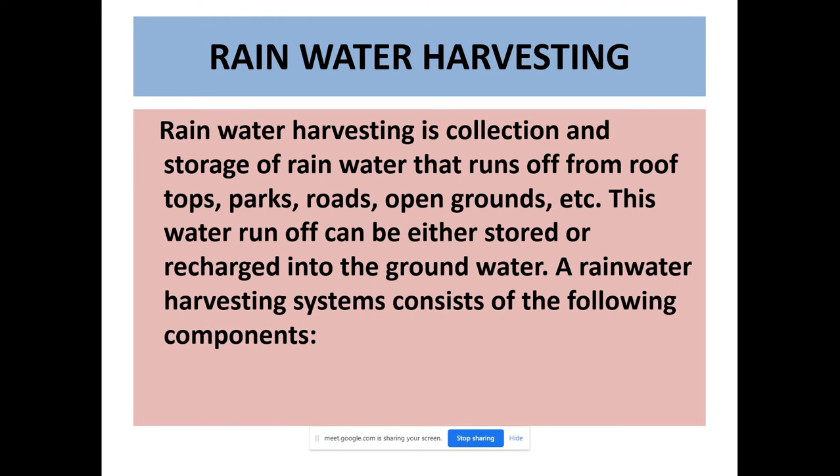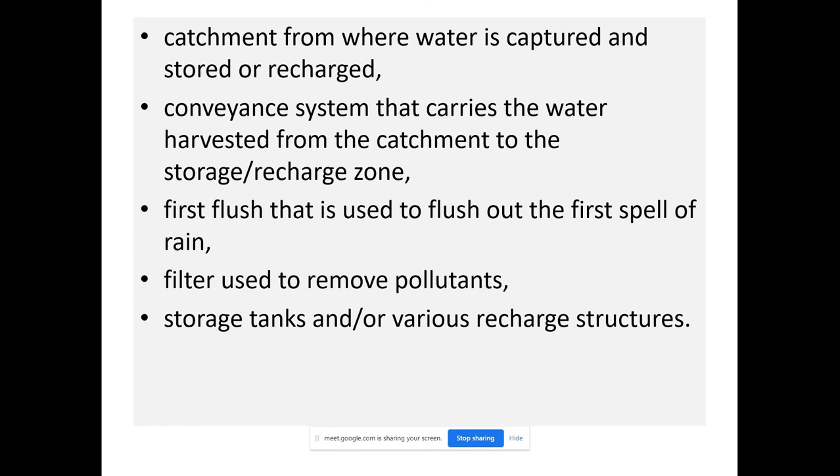A filter to remove the pollutants, and storage tanks. I have also included the diagram of a simple rainwater harvesting system in my PPT, and I request Mamta ma'am to show the next page of my PPT. Yes ma'am, thank you ma'am.

As you can see, this is a simple diagram of a rainwater harvesting system. Rainwater is collected on the roof of your house or building, and the rainwater is stored in the tank, and the tank is connected to the roof with pipes. The pipes will carry the rainwater to the tank.

There are two methods of rainwater harvesting. First is surface runoff harvesting. In this system, the rainwater present on the grounds during the rains will be collected to designated water storage. The flow of small tributaries of rivers or reservoirs is redirected to store the surface runoff. The surface runoff is stored in ponds, tanks, and reservoirs built for this purpose. During the storage of rainwater, efficient and effective water conservation methods are incorporated. Several measures are taken to sustain healthy and hygienic water.

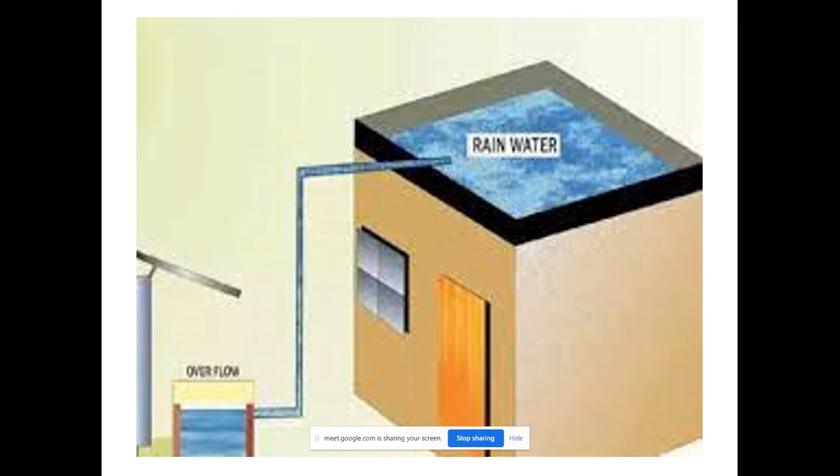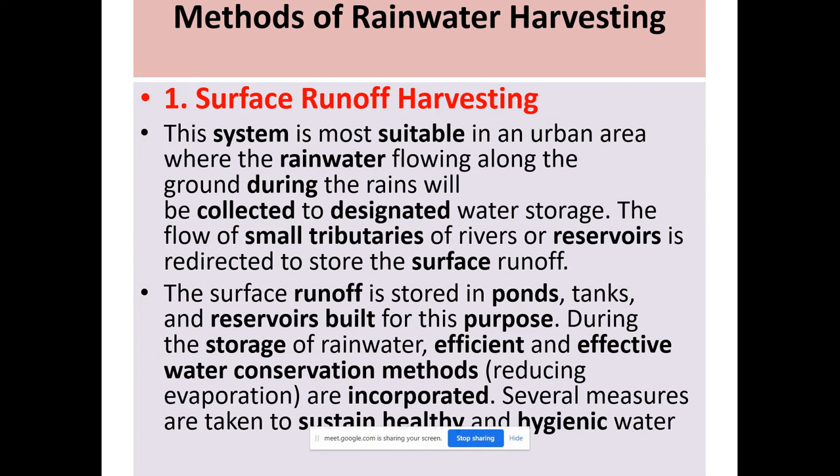And the second method of rainwater harvesting is rooftop rainwater harvesting. Ma'am, I request you to please show the next slide, yes. This is the slide of surface runoff rainwater harvesting system, and this is the diagram. In this system, the rainwater is collected on the grounds, and it is stored in tanks.

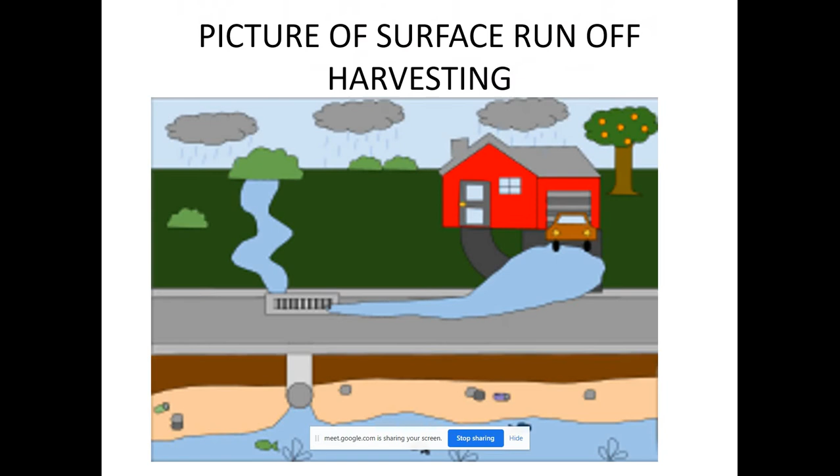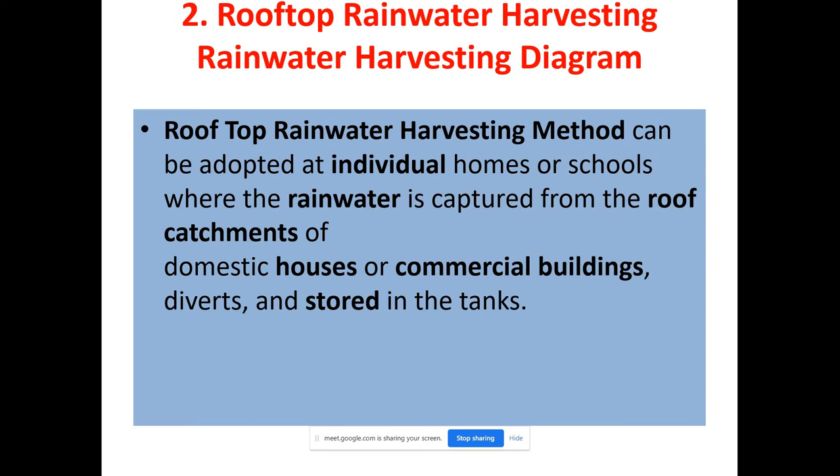Second method is rooftop rainwater harvesting system. This method can be adopted in individual homes or schools where the rainwater is captured from the roof catchment of domestic houses or commercial buildings, diverted and stored in tanks. Harvested rainwater can either be stored in a tank or diverted to an artificial recharge system to meet daily needs such as flushing toilets, washing machines, vehicles, gardens, showers, sinks and baths.

This is installed in the following places. You can install it in your home, school, college, apartment, flats, story buildings, industries, factories, mills. This water can also be used in swimming pools where we need a large amount of water, and it can also be installed in stadiums.

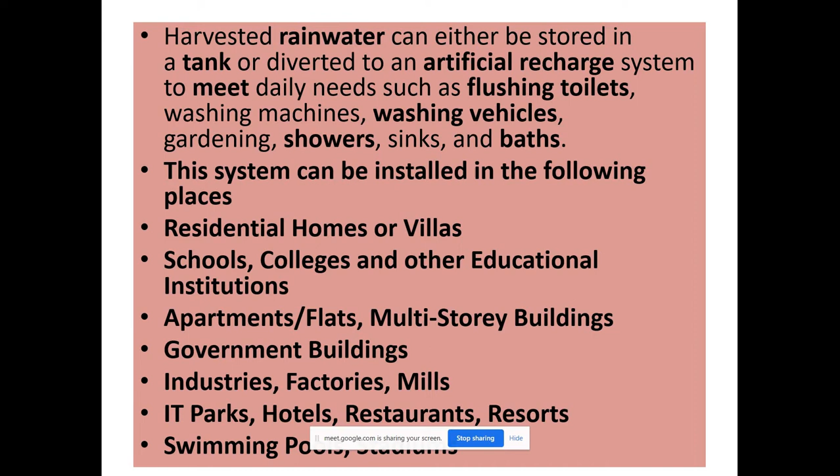Now I am going to tell you about the components of the rooftop rainwater harvesting system. First is catchment. The catchment of the rainwater harvesting system is the surface area that receives the direct rainfall and contributes rainwater to the harvesting system. It can be a terrace, the roof, flat roof, stone roof or sloping roof, courtyard or paved or unpaved open ground.

The second component is transportation. Transportation of rainwater from the rooftop is carried to the harvesting system through water pipes or drains. The mouth of each drain should be surmounted by wire mesh to restrict floating material, and water pipes must be UV resistant to the desired capacity.

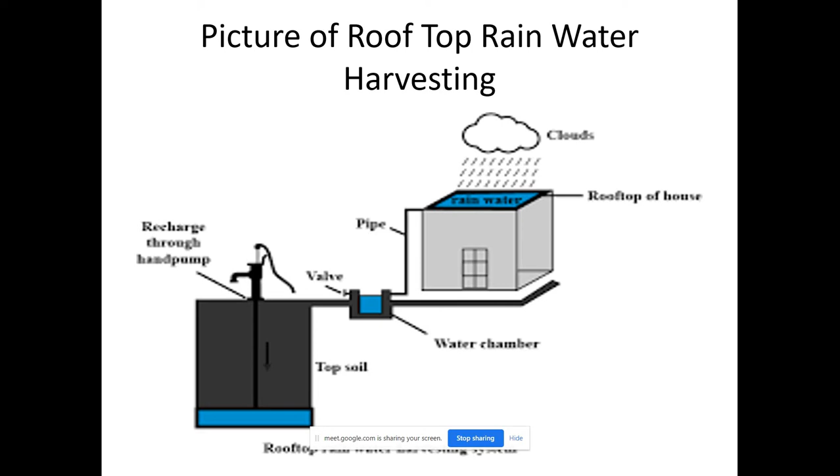The third is filter. The filter is used to filter the rainwater because rainwater contains many pollutants. To filter the pollutants, we use filters, such as filter papers installed in the pipes. Filters are used for removing turbidity, color and microorganisms from water. Gravel, sand and mesh filters are designed to place on top of the storage tank, and their function is to remove silt, dust, leaves and other organic matter from entering the storage tank.

In this way, you can install the rainwater harvesting system in your homes, houses and educational institutions and save water to meet the water demands. That's all, ma'am. Thank you.

Okay, why are filters used? This is used to check the contamination of sewer water, ma'am. Because I think rainwater is also pure water that can be used to drink, or for other purposes. First of all, ma'am, maybe rainwater is pure, but our roof may contain pollutants, like dust, or some other type of thing that may contaminate the water and pollute it.

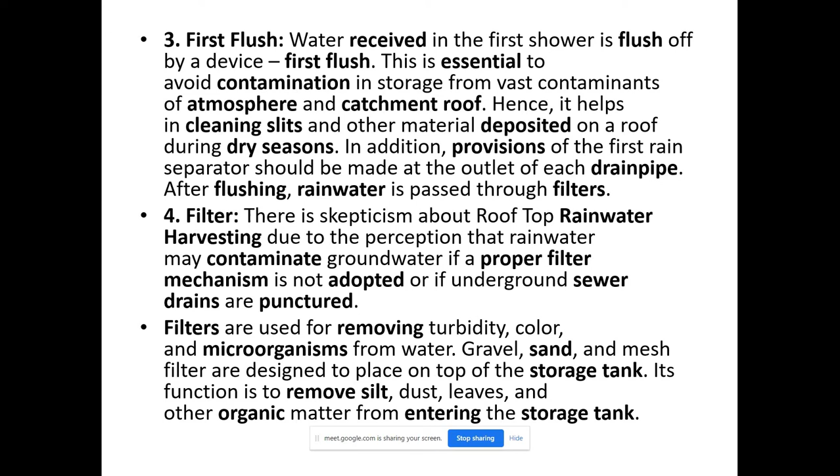Yes, we also need to say what is the source of where we are saving this water, rainwater. Like on the ground, if we are saving on the ground, it should not be mixed with other things. In our home, we can build underground tanks where we need the filter to save rainwater. I also want to add that at present, in my own home, I have a rainwater harvesting system. We have built an underground tank to save rainwater. So I think for underground water, filters are necessary so that it cannot be mixed with sewer water or other types of water. Yes, filter is important.

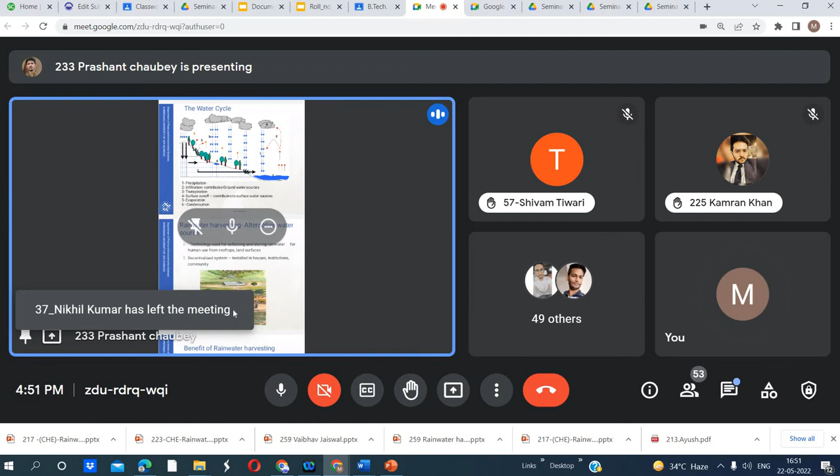Whereas other world forums, like the United Nations Environmental Program, take regular decisions on rainwater harvesting.

This is a very simple method. Generally, the roof of the house acts as a water collector. Then through pipes, water is stored in a tank or a container, and this can be used for our daily uses.

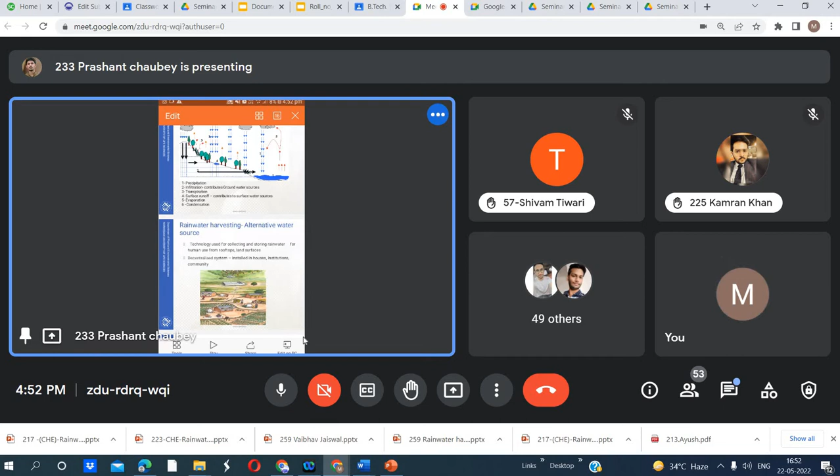It can be used for drinking too when we filter it in a proper manner, and it can be used for toilets and other places.

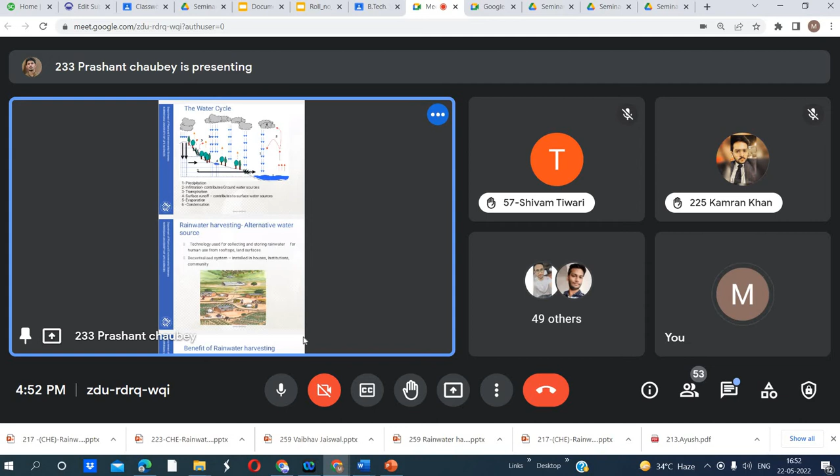The most important thing about installing a rainwater harvesting system is to know about the rainfall of that area. Rainfall is the most important factor to decide the efficiency and use of a water harvesting plant. Thank you.

Ma'am, is the screen visible to you? Okay, just increase your size. Just zoom it.

Use of harvested rainwater for non-potable purposes is mainly in urban areas, for gardening, flushing, and washing clothes. Potable water use, ensuring quality, is mainly in rural and peri-urban areas. This is a small-scale rainwater harvesting system and its uses.

So, rainwater harvesting system is basically a technique to store rainwater for use of different kinds. It is very economical, and since we are lacking water in this contemporary time, rainwater harvesting is a very good alternative for managing water as a resource in deserts and water-scarce areas. This is all my presentation. Thank you, ma'am.

Okay, please open my PPT 225. Would you like to ask any question? This is not the way, na? You should learn some manners, because it was my turn, I have given it to Punit to attend. He has to catch a train. That's why I am providing you a good platform, but you should follow manners. Okay, I think I'm taking it. Now, who wants to present?

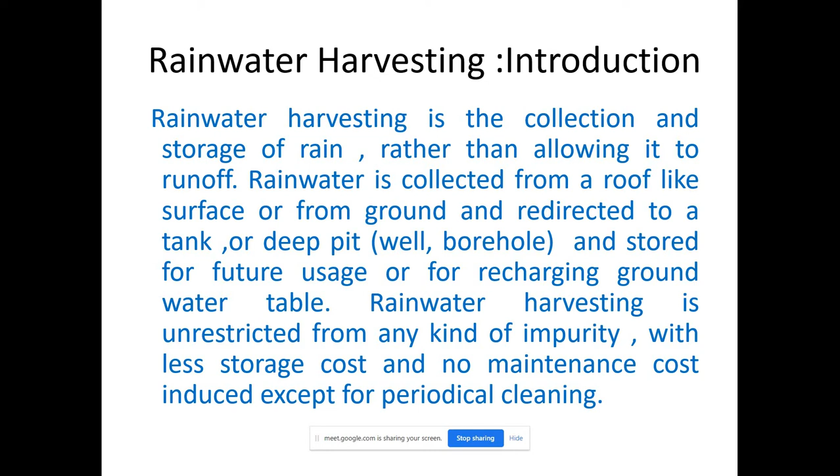To meet the increasing demand of water, as the population increases, the demand of water is also increased. That's why we have need of water harvesting. It can be harvested by reducing runoff, reducing soil erosion, improving groundwater, and increasing agriculture production.

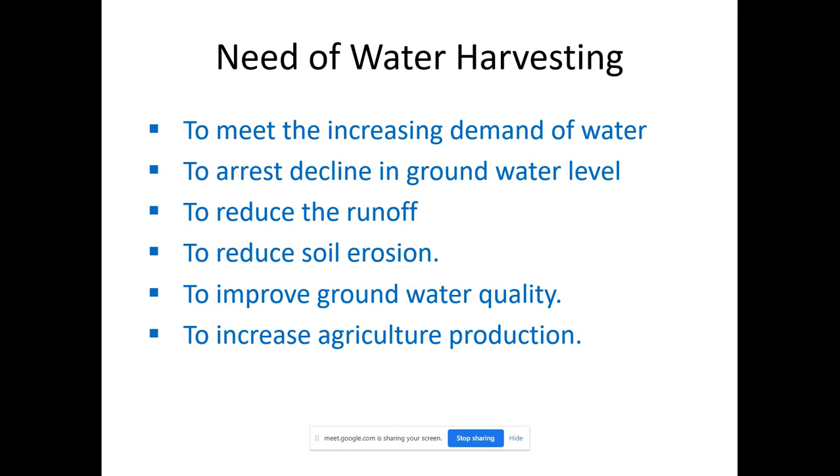We have two methods of water harvesting: surface runoff and roof water harvesting. Surface runoff is a method of collecting rainwater flowing along the ground during rains. It is collected in a tank below the surface of the ground for irrigation and other purposes. In urban areas, this method is followed very well because water is collected on roads and roofs.

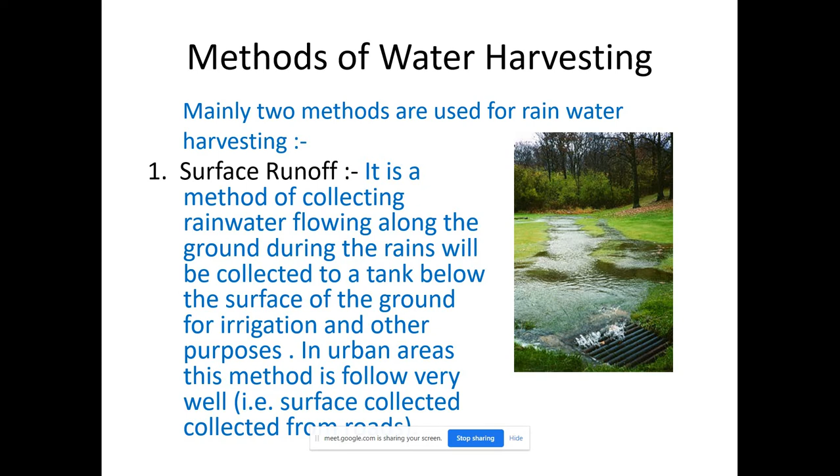This is completed. Rooftop rainwater harvesting: in rooftop rainwater harvesting, the roof becomes the catchment and rainwater is collected from the roof of the house or building. It can either be stored in a tank or directed to an artificial recharge system. This method is less expensive and very useful, and if implemented correctly, helps in augmenting the groundwater level of the area.

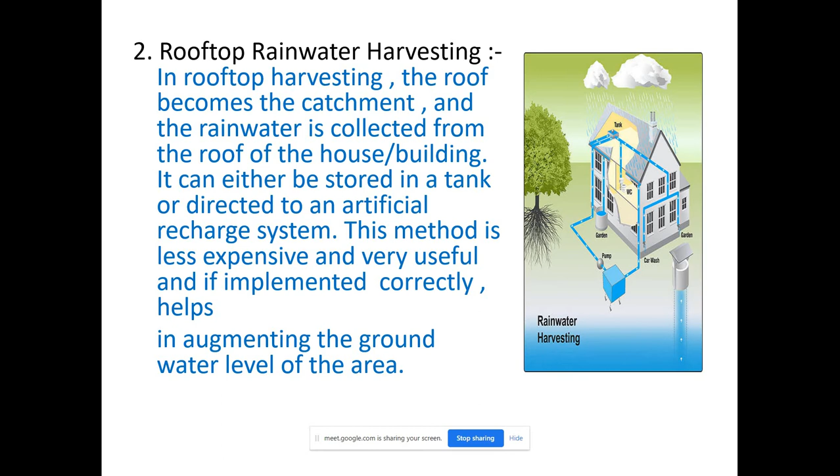Now, advantages and disadvantages of water harvesting. Advantages of water harvesting: reduce water shortage, prevent flooding, reduce soil erosion, improve quality of water, increase the groundwater table and quality, help in reducing water and electricity bills, low maintenance cost and easy to maintain.

Disadvantages of water harvesting: initial high cost, because we buy pipes and labor, so the initial cost is high for water harvesting. Regular maintenance is required to prevent impurities that come from the top and from roads. Storage limit, unpredictable rainfall. If not installed correctly, it may cause waterborne diseases like malaria, typhoid, etc.

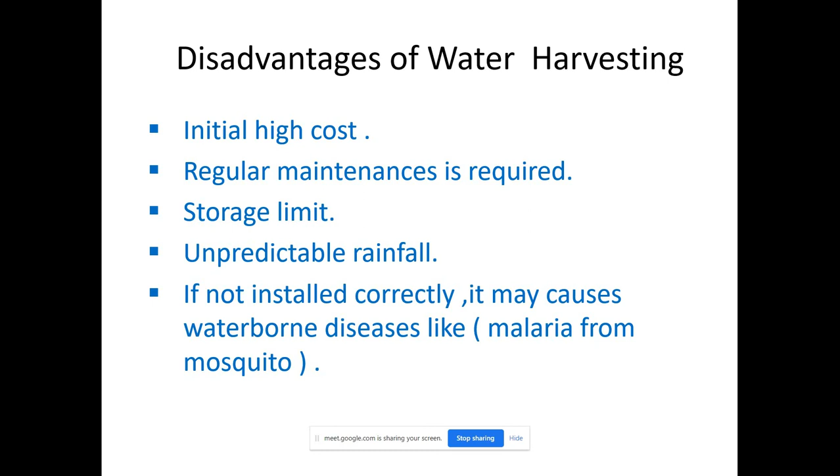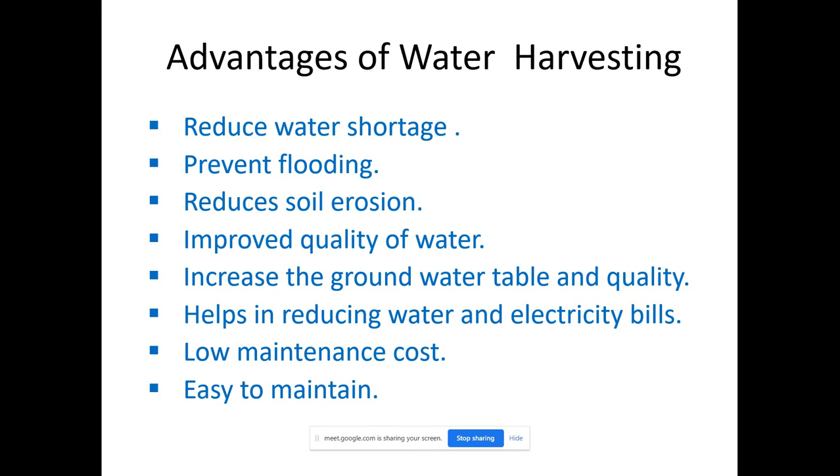Okay, what you can do, Garima, in the future for the development of water resources, the method of water resource management, because rainwater harvesting system is one of the water resource management systems. Is there any other method?

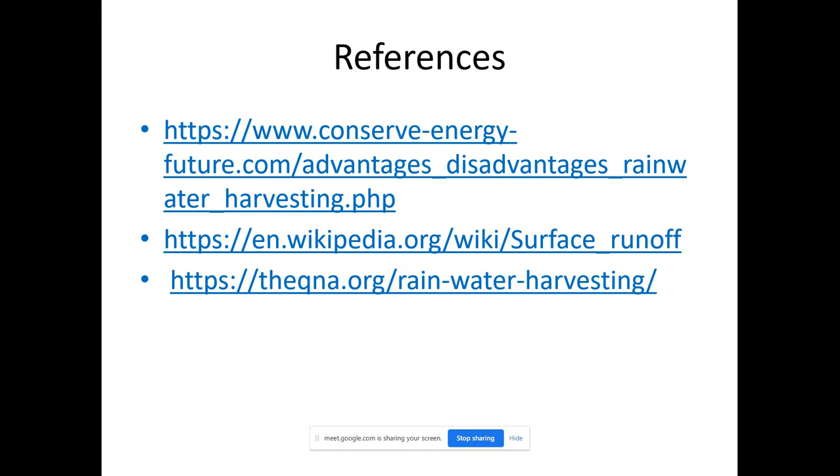Can you suggest? Yes, ma'am. In villages, we dig a pit in which we store our water for agriculture and irrigation. This was very helpful for the future, because in rural areas the water is very insufficient for agriculture.

In urban areas, the water is easy to use, and we use motors, so water is very wasted in urban areas. But in rural areas, we draw the water through hand pumps and from wells.

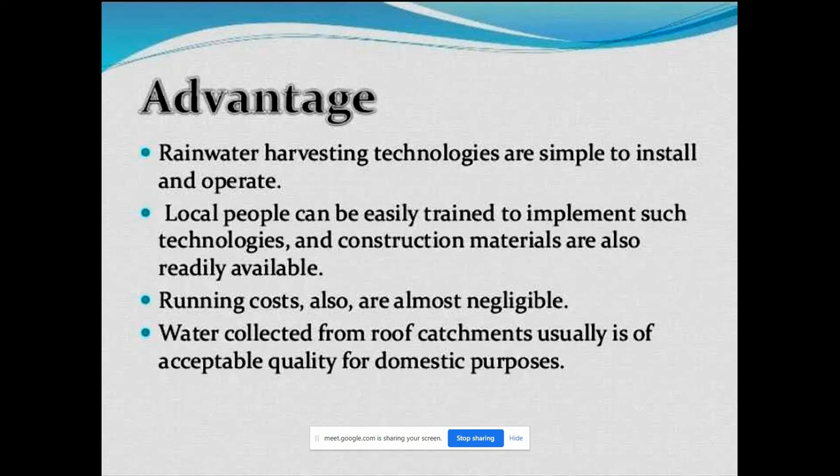Then, what is the advantage of rainwater harvesting? Advantages of rainwater harvesting: reduce water storage needs, prevent flooding, reduce soil erosion, improve the quality of water, increase groundwater table and quality, help reduce water and electricity bills, mitigate the effects of drought, low maintenance cost, environmentally eco-friendly, and easy to maintain.

Then we will know about the disadvantages of rainwater harvesting.

Disadvantages include unpredictable rainfall, initially high cost, regular maintenance, storage limits if not installed correctly, and the risk of attracting mosquitoes and other pests. There are different methods to collect rainwater harvesting.

I am discussing only two methods. The first is surface runoff, and the second is roof rainwater harvesting. In surface rainwater harvesting, in urban areas rainwater flows as surface runoff, which can be captured and used to recharge aquifers by adopting the appropriate method.

The second method is roof rainwater harvesting. It is a system for catching rainwater where it falls on the rooftop. The roof becomes the catchment, and rainwater is collected from the roof of the house or building. This method is less expensive and very effective.

Now we will learn about the components used in rainwater harvesting. First is the catchment area, then transportation, first flush, storage system, delivery system, and filter system. The catchment area is the surface that receives the rainfall directly in a rainwater harvesting system. It may be a terrace, courtyard, etc.

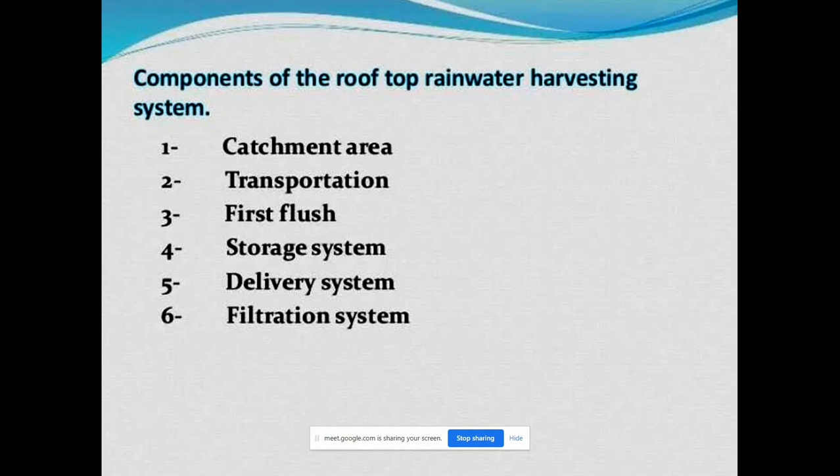Next is transportation. Rainwater from rooftops should be carried through down-take water pipes and drains to the storage harvesting system. The water pipes should be UV resistant and sized for the required capacity.

Next is first flush. What is it? First flush is a device used to flush off the water received in the first shower of rain. This is needed to avoid contaminants from the atmosphere and the rooftop catchment entering the rechargeable water.

Next is the storage system. All collected rainwater is stored in a tank or barrel. Next is the delivery system, which delivers water for usage. Pumps are used to take out water from the tanks and deliver it for many purposes. There are many methods of water delivery.

Next is the filtration system. Filters are used to treat water, effectively removing turbidity, color, and microorganisms. After the first flush, the rainwater should pass through the filter. There are different types of filters in practice, but their basic function is to purify water.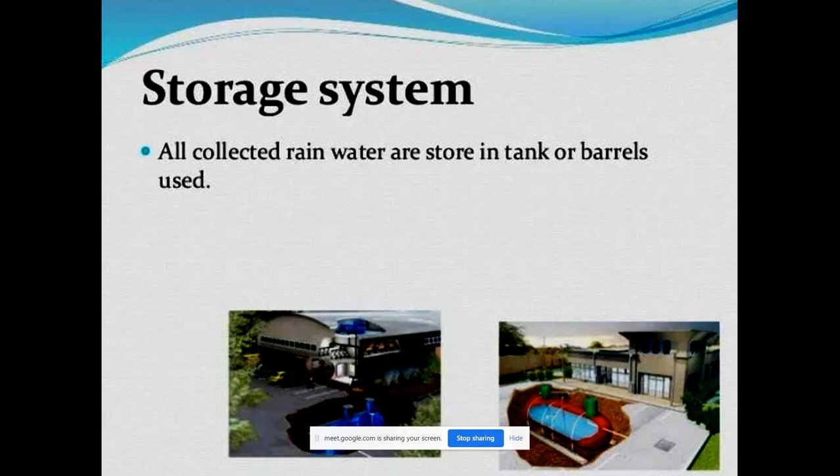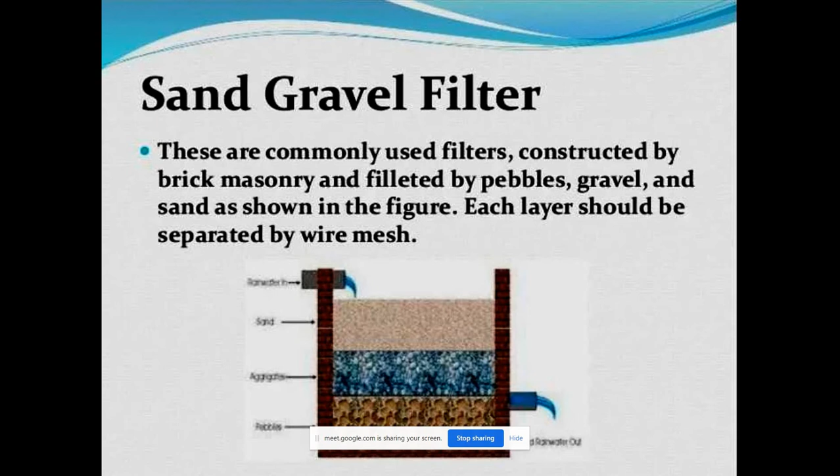Sand and gravel filters are commonly used, constructed with bricks and masonry, filled with pebbles, gravel, and sand as shown in the figure. Each layer should be separated by wire mesh. Another type is the charcoal filter, which can be made in-situ or in a drum. Pebbles, gravel, sand, and charcoal are layered in the drum or chamber, each layer separated by wire mesh, with a thin layer of charcoal used for absorption.

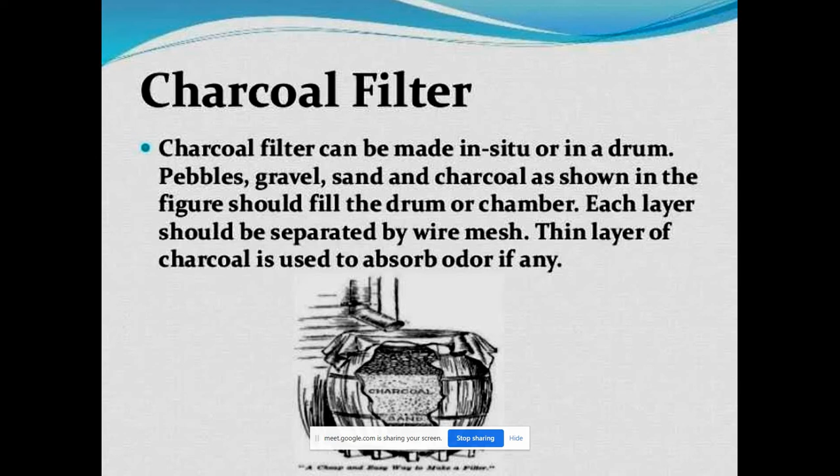For example, in Tamil Nadu, rainwater harvesting was made compulsory in every building to avoid groundwater depletion. In Rajasthan, rainwater harvesting has traditionally been practiced by the people of the Thar desert. At present, in Pune, Maharashtra, rainwater harvesting is compulsory for new societies.

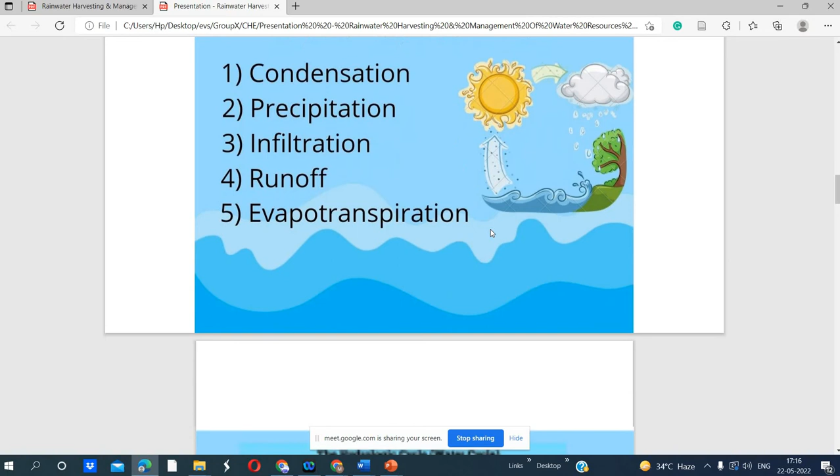Evapotranspiration. The hydrological cycle, water cycle is... ma'am, please change the slide. Precipitation is a product of condensation of atmospheric water vapor, falling under gravity to the land surface as rain. It infiltrates the soil or flows to the ocean as runoff or surface water, evaporates returning moisture to the atmosphere, while vegetation returns water to the atmosphere by transpiration.

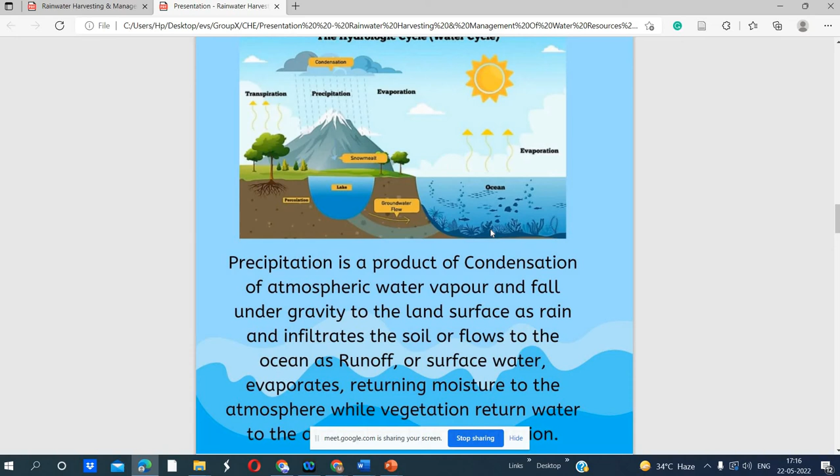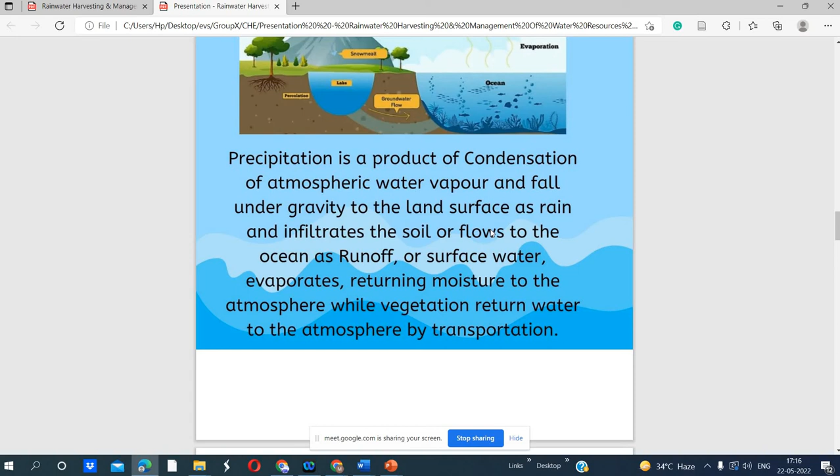Rainwater harvesting is a promising alternative infrastructure amid increasing water scarcity and escalating demand for water supply. It maximizes water efficiency by capturing it and minimizes environmental impact for large projects where pressure on water supply occurs.

The term rainwater harvesting system refers to a technology used to collect and convey rain for future use from relatively clean surfaces such as roof, land surface, or rock catchment, and store it.

Management of water resources: we are using different types of technology to store the water. There are several rainwater harvesting technologies to store the water. Huh? What are you telling? You're just reading the slide, but read it properly. Store the water, okay yes, carry on, store the water.

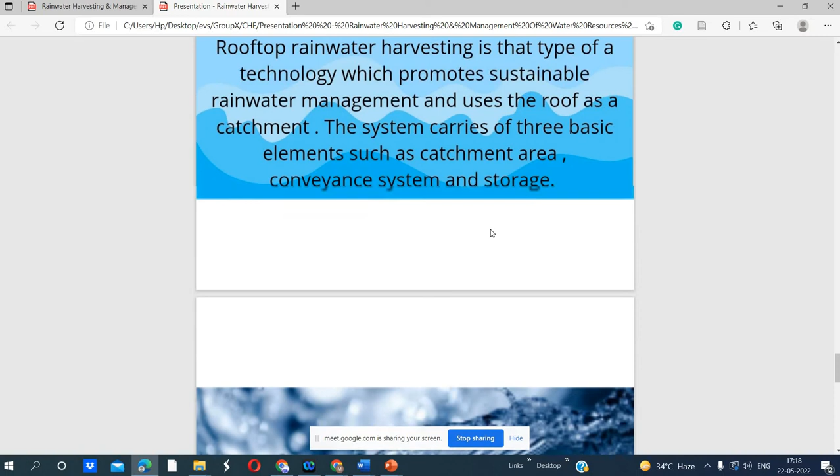There are several rainwater harvesting technologies such as rooftop, surface water, and groundwater recharge. Rooftop rainwater harvesting is a type of technology which promotes sustainable rainwater management and uses the roof as a catchment. The system comprises 3 basic elements: catchment area, conveyance system, and storage.

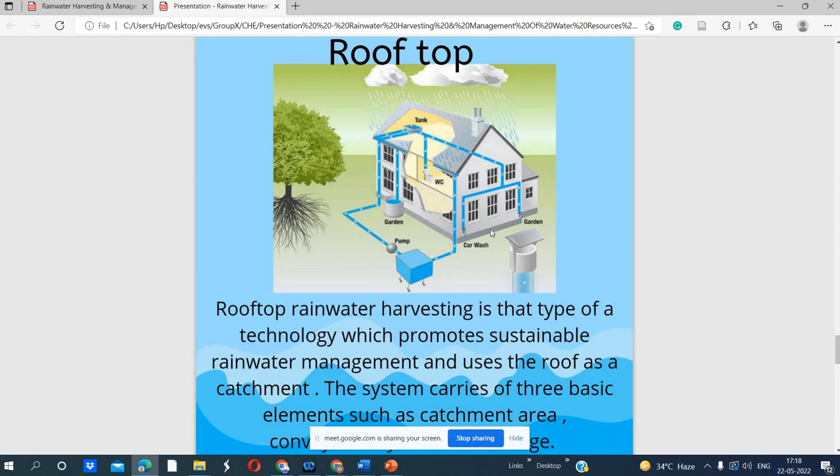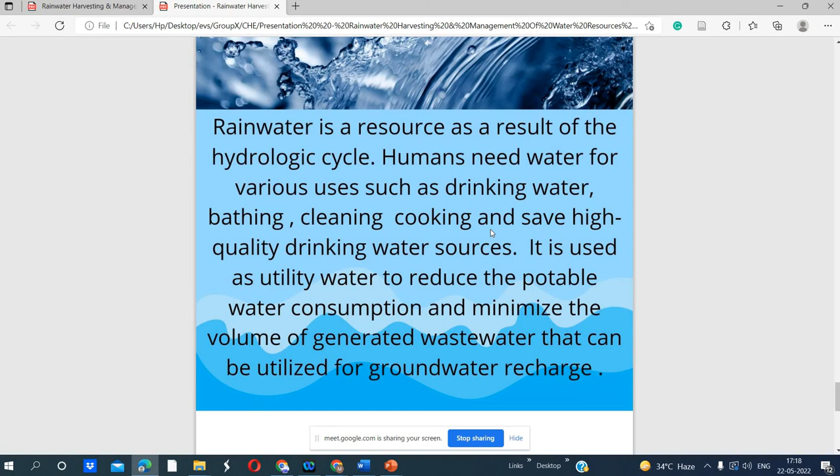Rainwater is a resource resulting from the hydrologic cycle. Humans need water for various uses such as drinking, bathing, cleaning, cooking, and save high quality drinking water sources. It is used as utility water to reduce potable water consumption and minimize the volume of generated wastewater that can be utilized for groundwater recharge. Thank you.

Okay, can you suggest any development to this method? What do you think? How can you use your present education for the development of this method?

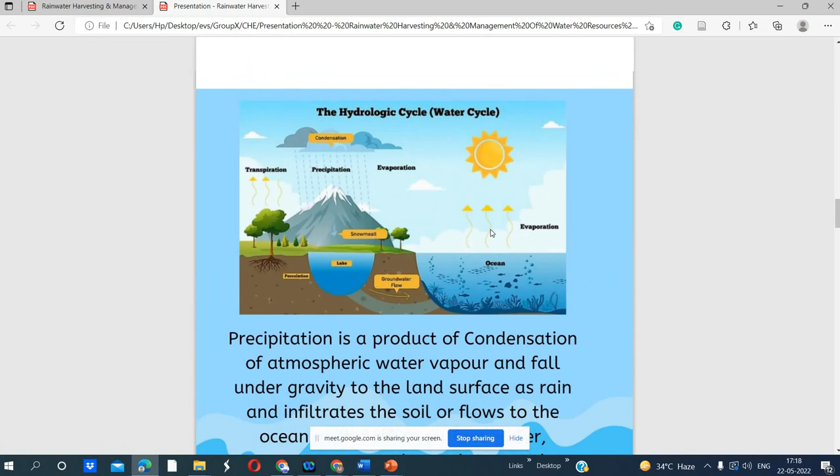Rainwater harvesting is a method to store water for a long period of time, and it is easily usable and sustainable to develop different types of tanks to store water for several works.

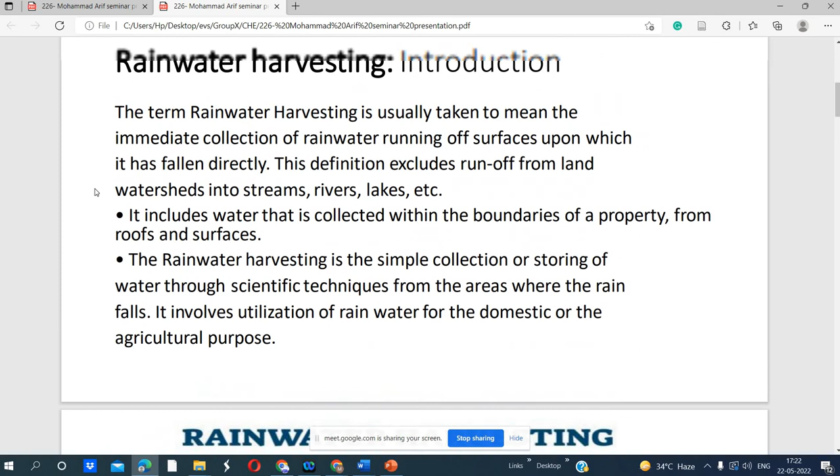Methods of rainwater harvesting: Surface runoff harvesting is a method in which rainwater flowing as surface runoff is caught and used for recharging aquifers by adopting appropriate methods. Rooftop rainwater harvesting: in rooftop harvesting, the roof becomes the catchment and the rainwater is collected from the roof of the house or building. It can either be stored in a tank or diverted to an artificial recharge system.

Technique: storage of rainwater on surface for future use. The storage of rainwater on surface is a traditional technique using structures such as underground tanks, ponds, check dams, weirs, etc. Advantage of rainwater harvesting: it reduces runoff which chokes drains and avoids flooding of roads, provides self-sufficiency to water supply, and supplements domestic water requirements during summer and drought conditions.

Disadvantage of rainwater harvesting: catchment surfaces and guttering structures must be cleaned and flushed before use. Poorly constructed water jars and containers can suffer from algal growth and invasion by insects, lizards, and rodents. They can act as a breeding ground for disease vectors if not properly maintained.

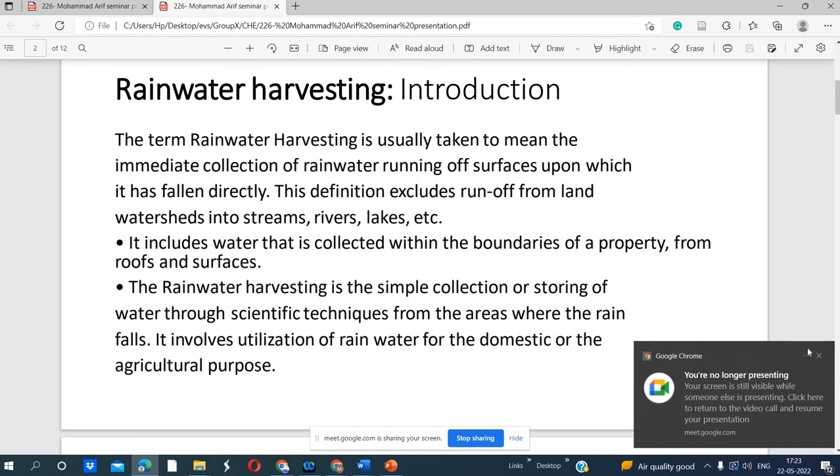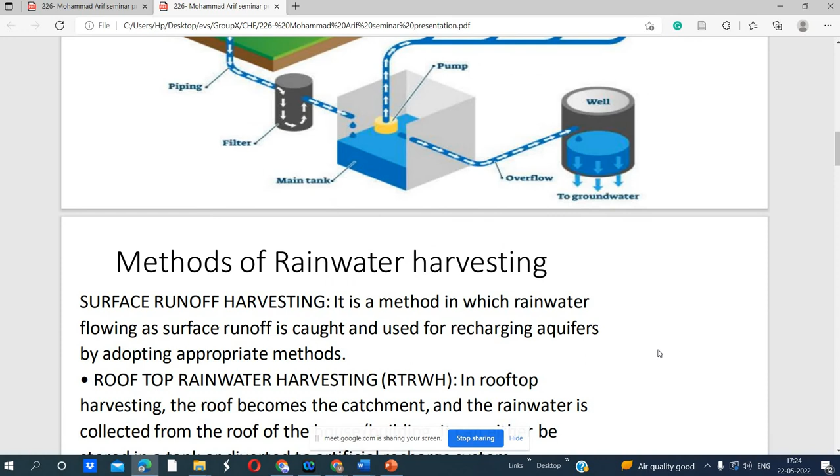Management of water resources: water resources management is the activity of planning, developing, distributing, and managing the optimum use of water resources. It is an aspect of water cycle management. Desiltation: channels, canals, tanks, and yeris must be desilted regularly during the summer months. People should be encouraged to revive the ancient practice of protecting trees around tanks. Major rivers were sanctified and groves were established around villages and on river banks.

Afforestation of barren hilly slopes on a war footing should be carried out. Trees withstand drought better than crops. They check dust, replenish streams, provide shade to cattle and men, and give fodder for cattle. Ponds and tanks: creation of small reservoirs and percolation tanks to hold runoff water must be implemented and maintained well.

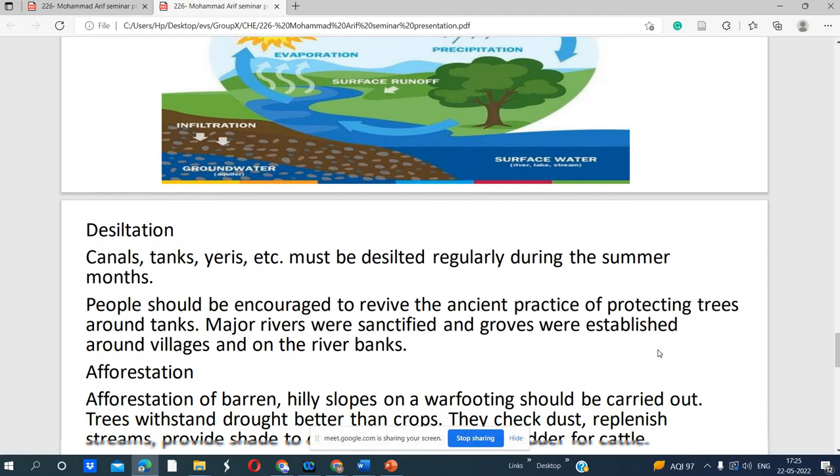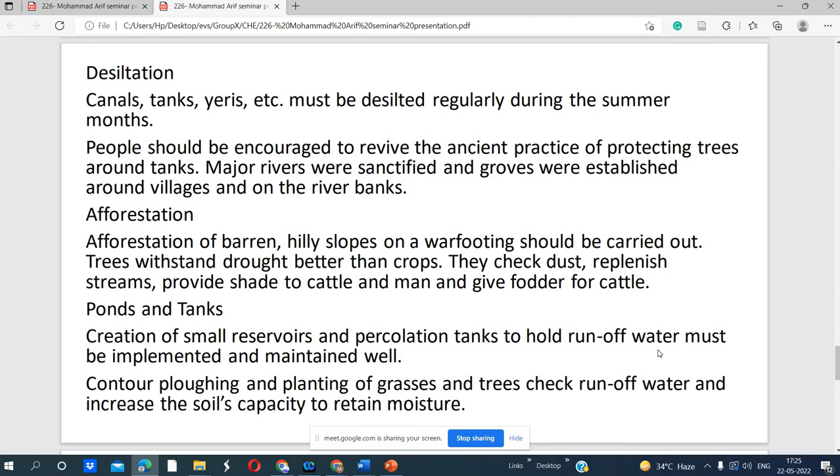Contour plowing and planting of grasses and trees helps retain runoff water and increases the soil's capacity to retain moisture. Green manuring and mulching the soil, along with drip irrigation, is most suited for widely spaced row crops like vegetables, cotton, and sugarcane for harvesting rainwater. Thank you, ma'am.

Okay, what do you suggest for the development of more water resource management methods? Ponds and tanks are most valuable. Creation of small reservoirs and percolation tanks to hold runoff water must be implemented and maintained well.

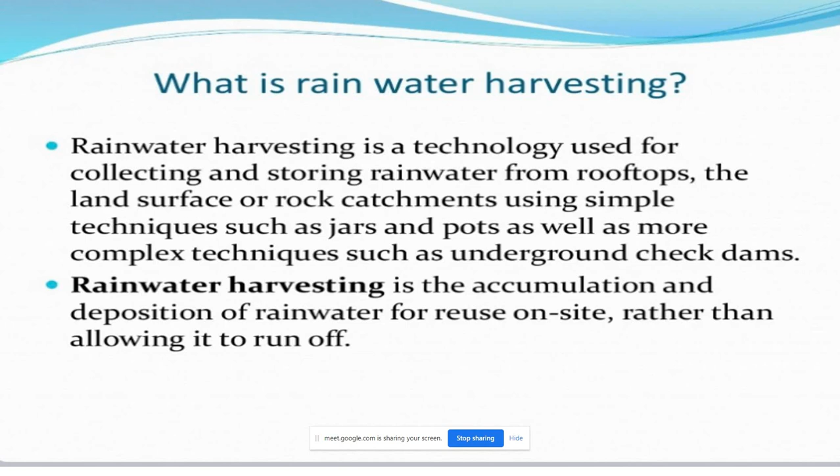The combination of urban green rooftops with rainwater catchments have been found to reduce building temperature by more than 1.3 degrees Celsius. Rainwater harvesting in conjunction with urban agriculture would be a viable way to help meet the United Nations Sustainable Development Goals. Uses of rainwater include recharging underground water, gardening, livestock, drinking purposes, and irrigation purposes.

Advantages of rainwater harvesting technologies: simple to install and operate, local people can be easily trained to implement such technologies, and construction materials are also readily available.

How can we harvest rainwater? Broadly, there are two ways of harvesting rainwater: surface runoff harvesting and rooftop rainwater harvesting. Rooftop rainwater harvesting is a system of catching rainwater where it falls. In rooftop harvesting, the roof becomes the catchment and the rainwater is collected from the roof of the house or building. This method is less expensive and very effective.

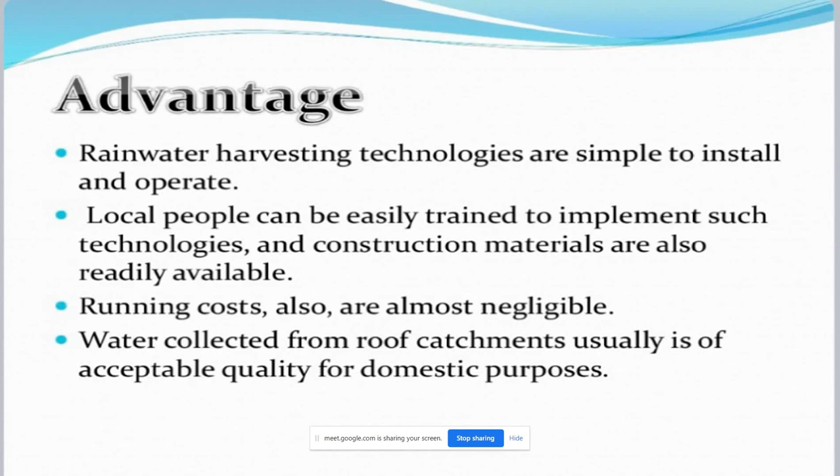The transportation of rainwater from a rooftop should be carried through downtake water pipes or drains to the storage or harvesting system. The water pipe should be UV resistant and of required capacity.

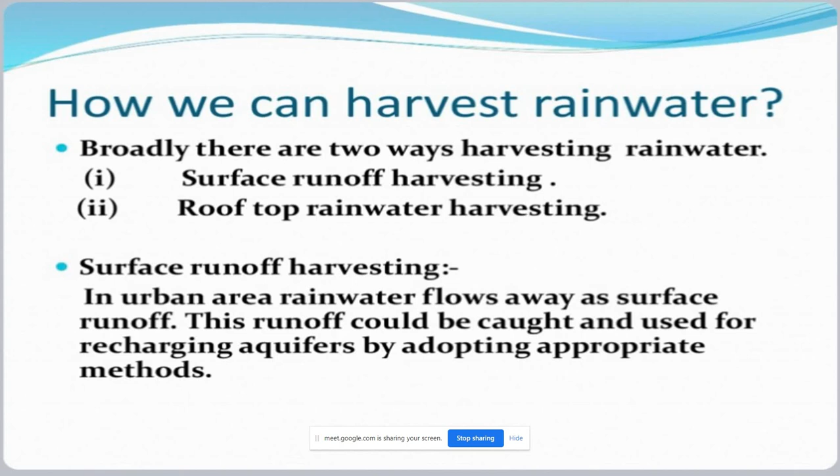Management of water resources provides an independent water supply during regional water restrictions, and in developed countries it is often used to supplement the main supply. It provides water when a drought occurs, can help mitigate flooding of low-lying areas, and reduces demands on wells, which may enable groundwater levels to be sustained. Rainwater harvesting increases the availability of water during the dry season.

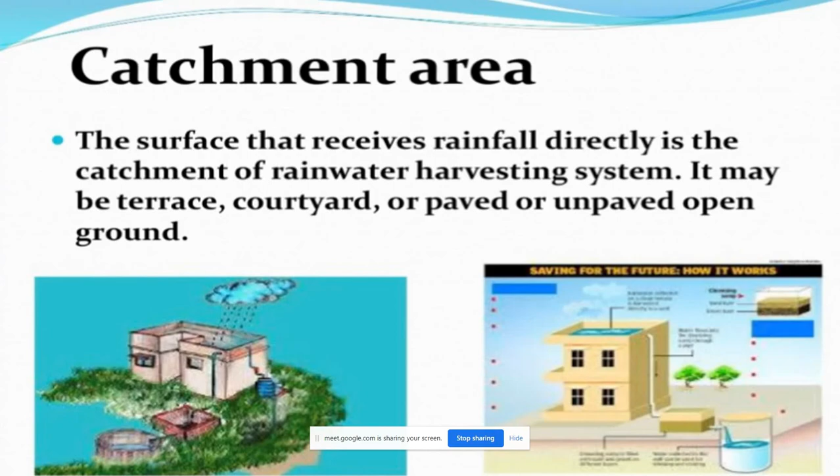What do you suggest, Kamran, for the future development of this method? For future development, we should give more importance to the management of water resources, like collecting and storing rainwater, not polluting the water, and treating waste before dumping.

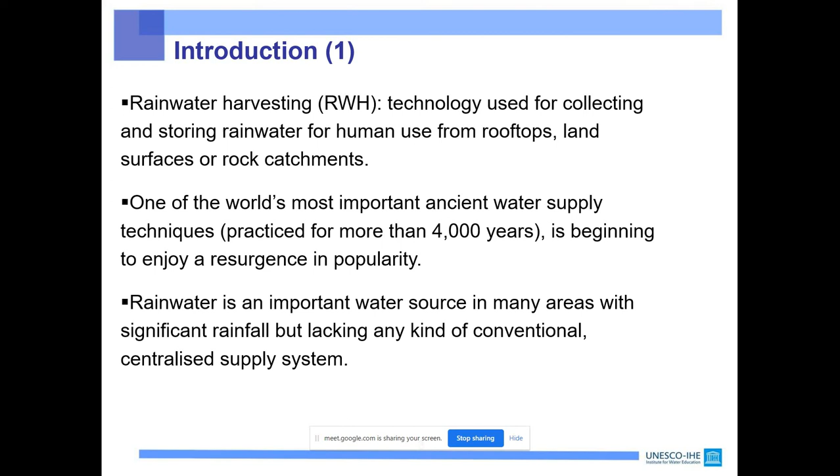We harvest rainwater, one of the best methods to preserve it, by the following: surface and rooftop harvesting.

I have shown in my presentation some examples. Sigiriya, Sri Lanka, that ancient civilization was using rainwater harvesting in their methods. So the limitations are: initial cost may prevent families from installing rainwater harvesting systems, and others.

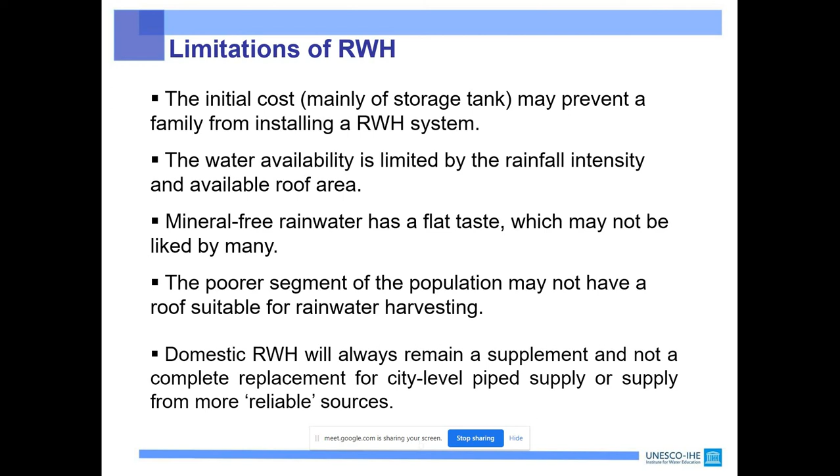Yes ma'am. Oh, this example, from where have you taken it? Okay, this site. Ma'am, I have given the site on page number 6.

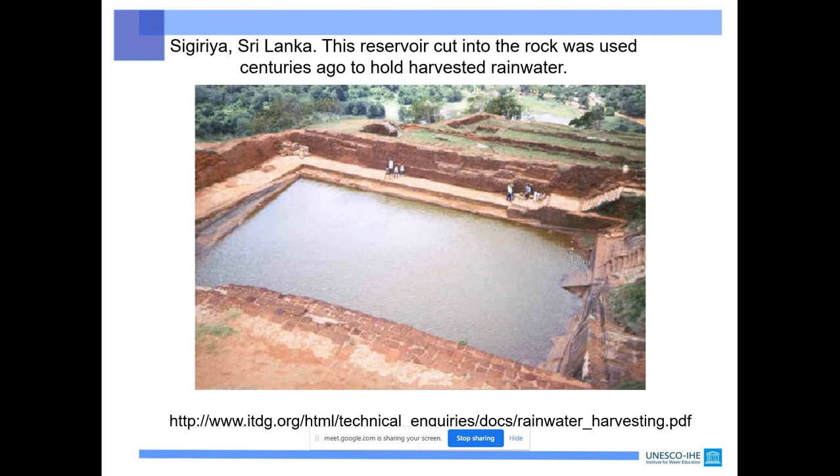Okay, what is the use of this reservoir? Why has it been used? What, ma'am? What was the purpose of this reservoir? How was it designed? Do you have any information on how it has been designed? You have placed the picture, yes ma'am, for common use like washing, bathing of buffalo and people. What was the design? What is this, what are we seeing?